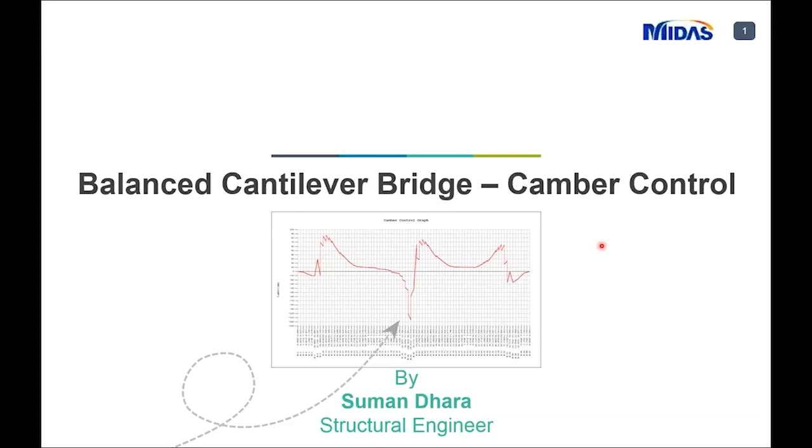So there are two methods of deck construction of balanced cantilever bridge. One is cast in place, where the false-work is put in and it's connected to the previously installed concrete and allowed to cantilever freely. Then permanent reinforcing steel and the supports would be installed, and finally concrete is poured and it's cured. So one segment would be cured on this side and this side, and they go about the next segment construction. So that's cast in place.

And there is another method called precast segmental deck erection, where the precast segments would be lifted to the position and adjusted, and then they will be pre-stressed, the new segments would be formed, and the cantilever erections would be performed. So these are the two methods of deck erection that are generally followed for balanced cantilever bridges. One is cast in place, another is precast segmental.

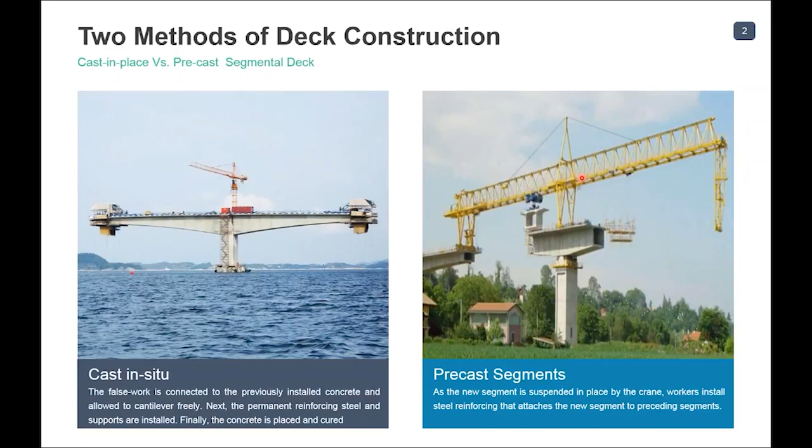So the construction stages that you define in Midas or any other program are very much required because the structure evolves. Hence, the structural analysis should be performed for each stage, and the sectional stability for each stage must be checked. As you see in this erection sequence, you have a pier table and these segments would be cast one after the other, and the tendons would be stressed, like the cantilever tendons or the continuity tendons.

So we need to consider time dependent characteristics of the concrete, and we need to consider the relaxation of the pre-stressing strands precisely. So the accumulated analysis results from the preceding construction stages are very much required for each subsequent construction stage. So we'll be carrying forward the analysis results to the next stages. That's how you make the accumulative construction stage analysis results. Alright, I hope this is very clear.

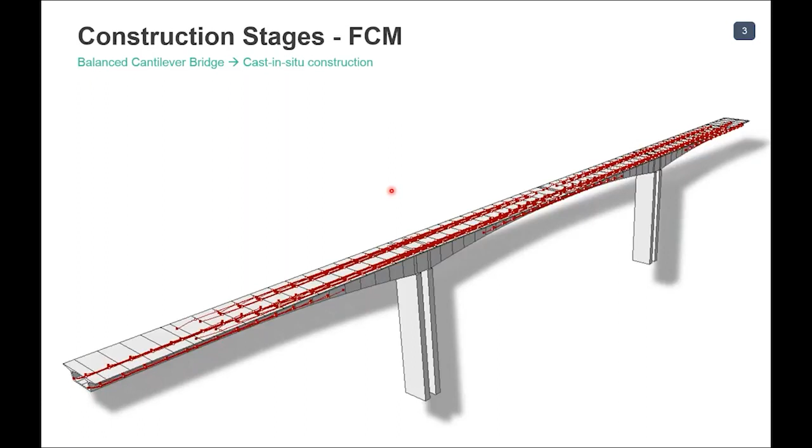So let's go into the next slide, where the main deformation problem is put on, where you have the factors that are affecting the deformation prediction. So first question is, why do you provide a camber? The camber is required to counter the deformations which are acting because of a lot of parameters. To counteract the deformation so that the traffic moving onto the bridge and the serviceability are not affected, and the rider on the bridge feels comfortable, you need to provide a pre-camber.

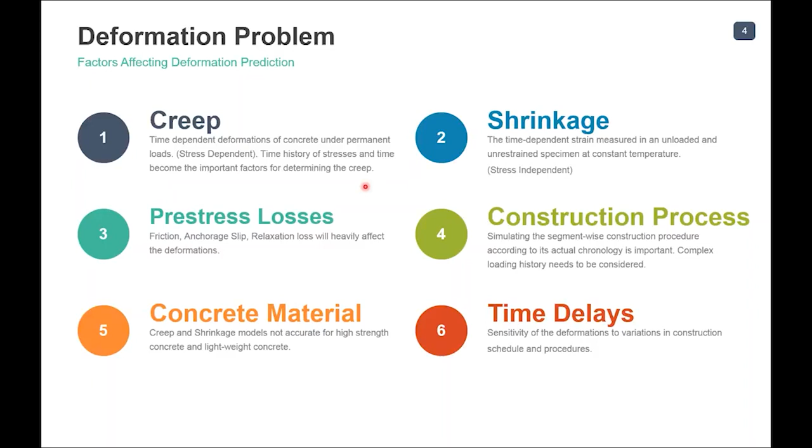So before getting into the pre-camber, you should calculate the deformation. The deformation prediction is very much important. There are a number of factors that will be affecting the deformation prediction. So first one is creep. As you know, creep is a time dependent deformation of the concrete under permanent loads. Mind you, this is stress dependent. So the time histories of the stresses and the time become the important factors for determining the creep. This is the complicated behavior of the concrete material itself.

And there's also one other material behavior, shrinkage. This is a time dependent strain measured in an unloaded and unrestrained specimen at constant temperature. That's what you call shrinkage of concrete. So this is stress independent, whereas the creep is stress dependent.

So next is the pre-stress losses. You also need to accurately capture the pre-stress losses that happen with time, like the frictional and anchorage slip. If you have a post-tensioning system, then you'll have the relaxation of the pre-stressing steel. All these factors will heavily affect the deformations.

All right, next is the construction process. As you know, balanced cantilever bridges are erected in this sequence. So this construction sequence and the chronological order of the casting of the segments is very much required, and simulating the segment-wise construction procedure according to the actual true erection sequence from the site is required. So the complex loading history needs to be considered.

Coming to the concrete material, nowadays most of these bridges are using high strength concrete, or they might be using lightweight concrete. These also affect the creep and shrinkage models that we will be considering. I'll be showing you some of the creep and shrinkage models in the coming slides, where this concrete material will affect those models.

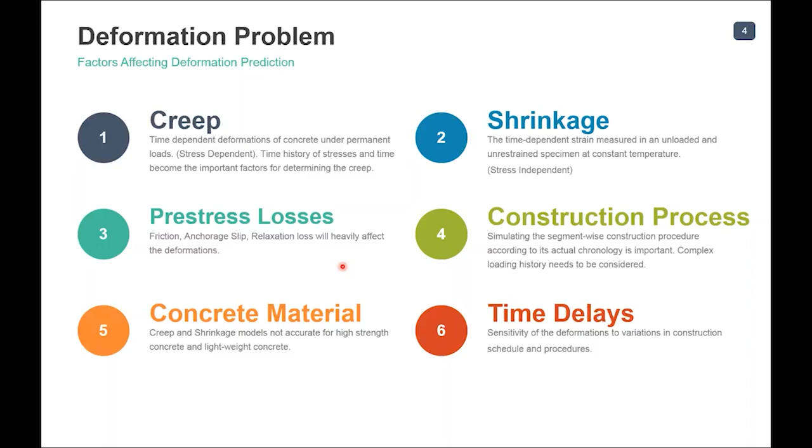So these are the main factors. These 6 factors will affect the deformations and the predictions, so we need to take care of them. Because of these factors, what happens if you have a segmental balanced cantilever bridge? You'll have excessive sag at the middle. If a rider goes here, he'll feel discomfort and the serviceability would be heavily affected.

And if you see the sequence where you are erecting from the left side and from the right side, there can be a deflection mismatch where uneven connection of free cantilevers can happen. So you also need to predict this deformation and provide the pre-camber so that these two will meet most accurately at the same location to provide a smooth transition.

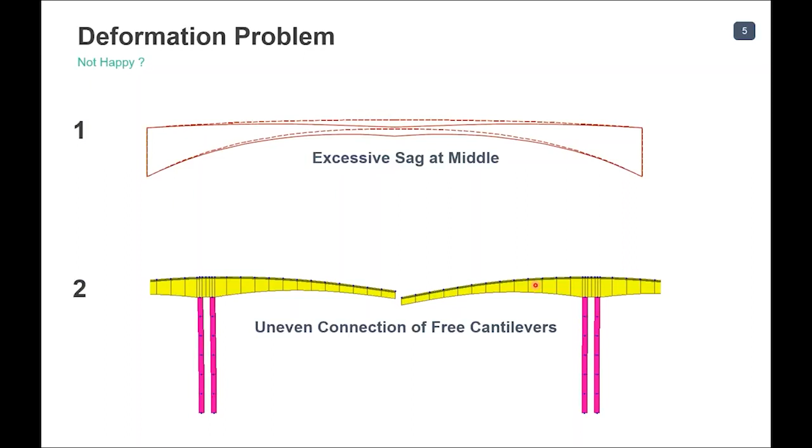So how to solve these 2 problems? Providing a pre-camber is the solution. Pre-camber by definition is the designed elevation of the span plus the necessary overheight. The design height can be straight, and the necessary overheight is what the pre-camber can be. So let's go to the next slide.

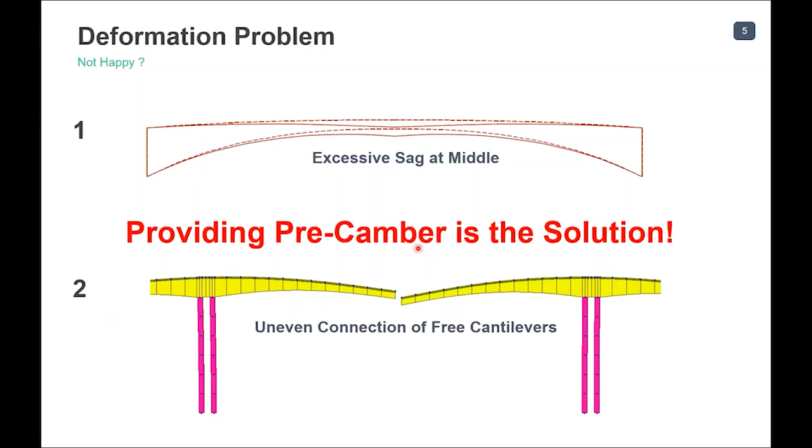So what about the deformation solution provided by Midas? In Midas, we always strive to provide innovative solutions which are practical and reliable. First, we have the factors creep, shrinkage, and compressive strength variation, which heavily affect the deformation prediction. We have in the program accurate long-term prediction models for creep and shrinkage as per codes like CEB-FIP, ACI, AASHTO or IRC.

So we have them as per code, and you can also give user defined values for the creep coefficient and the shrinkage strains. The program will consider the creep coefficient and shrinkage strains along with the compressive strength variation in the construction stage analysis. You can refer to this very interesting paper by Bazant 2001, a pioneer researcher who started these creep and shrinkage prediction models.

Compressive strength variation based on the maturity of the concrete member can also be defined with respect to the code, or you can have user defined values. Next, in the program, we have the construction stage analysis. I hope most people are aware of the construction stage analysis in Midas Civil.

We'll be performing the construction stage analysis accurately, taking into consideration all the factors involved in the balanced cantilever construction process, like the formwork load, how the segments are erected, and the time schedule of the two piers. Including all those details, we can accurately capture the pre-stress losses, even the relaxation loss of the tendons.

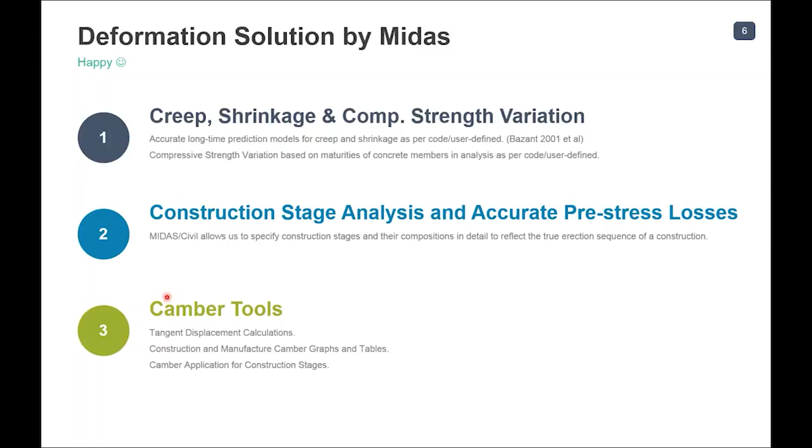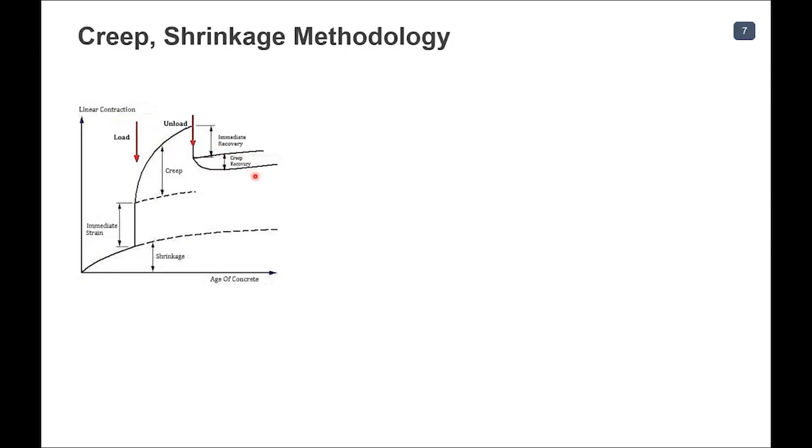And with the unloading of some loads, there can be an immediate recovery of the strains, elastic strain recovery, and the creep strain recovery. So this is the overall figure that speaks about the creep and shrinkage.

So coming to Midas, Midas uses an FEA approach with a time step method for calculating the creep strains. So the total strain here has components due to elastic and creep strains, due to shrinkage strains, and also due to thermal strain. This thermal strain will come into picture when you provide the thermal inputs.

All right. So coming to the creep strain, creep strain is the integration of the stress history. You integrate this whole stress history in a particular time period, like the construction duration from 0 to T days. You integrate the stress history with respect to the specific creep. So the stress is applied in time steps, keeping every other thing constant in a particular small time step, as you can see in this stress history curve.

So then there would be specific creep curves that would be generated with respect to the time. At each time interval, the specific creep curves can be obtained, and then you superimpose them. So you use the linear superposition method to combine the stress history with the specific curves to get the total creep strain. So it is an accumulative effect using the linear superposition, and the total creep strain is calculated.

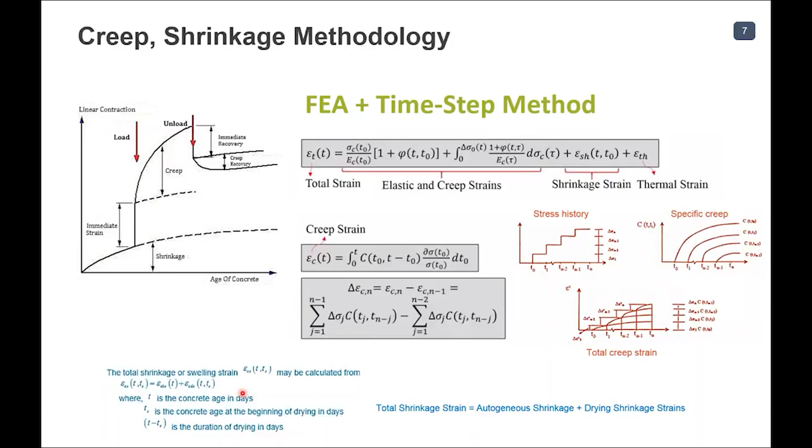So you should always take care about how the true erection sequence takes place on site, and you need to simulate the same things in the program to get the correct results for the design. If the actual construction stage is halted for any reason, then additional time steps can also be inserted into the respective stages, which I'll be showing you in the demo.

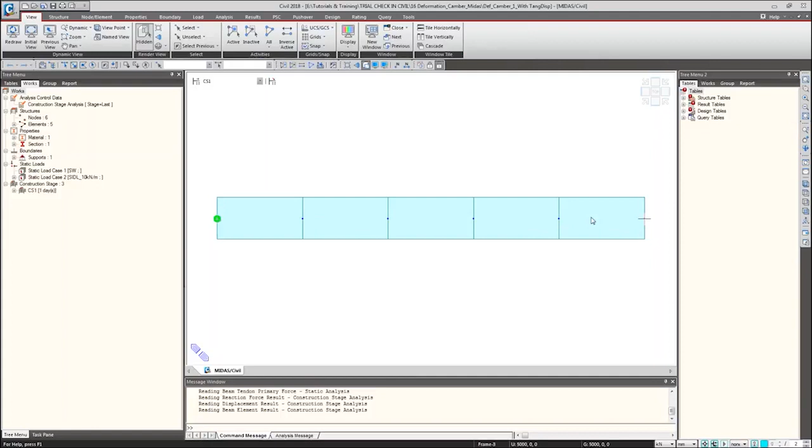Let me jump into the program now. I'll show you a trial model I have developed. You can see this is the cantilever. In stage one, this part is 5 meters, and this is the section. Coming to CS2, another 5 meter segment is added to the rest of the structure. Similarly, CS3. I'll perform the analysis and go to the results to check the deformations.

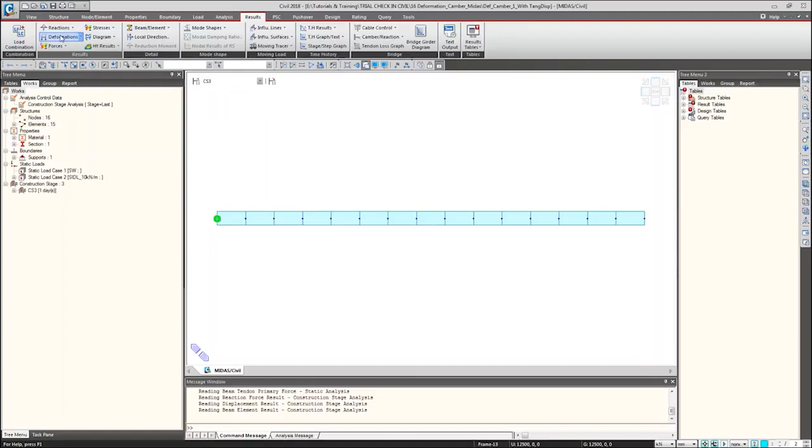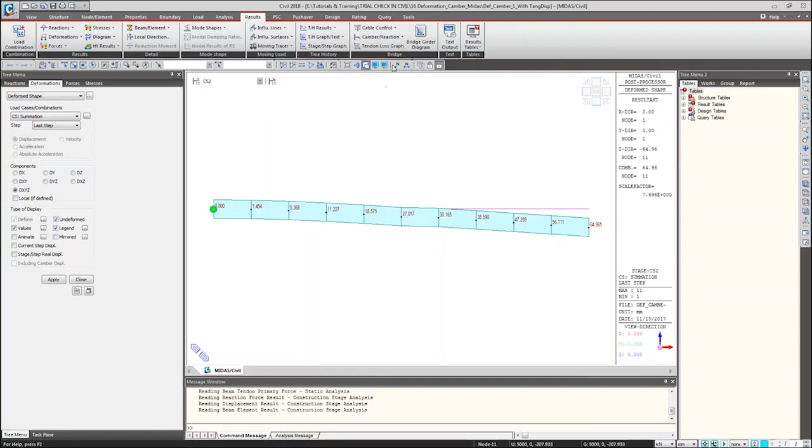For the deformations, I'll go to CS1, turn on the legend, turn on the undeformed shape, and turn on the values. You can see 4.789 for this segment. Coming to CS2, this is 64.965, and at this location it's 27.017. Coming to CS3, there is a kink over here. This is 257.

To check the current stage displacement, you have this option, current step displacement. For this to appear in the program, go to construction stage analysis and turn on save output of current stage. Then this option will appear. Select it, and if you go to CS1, the current step and stage displacements are the same for CS1 because there are no changes in the structure.

So in CS2, if you see, there is a change in the structure. This segment is being added. So in the current step, only because of this loading which is occurring in this 5 meters one, there is a subsequent deformation here. But if you turn off this and check, this is the addition of the previous displacement which happened in CS1. So that's why it's 20. That's why if you see here, the previous displacement would be added to this.

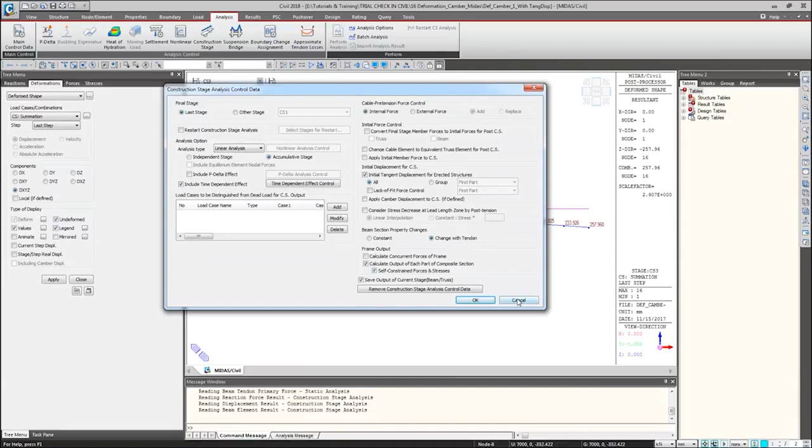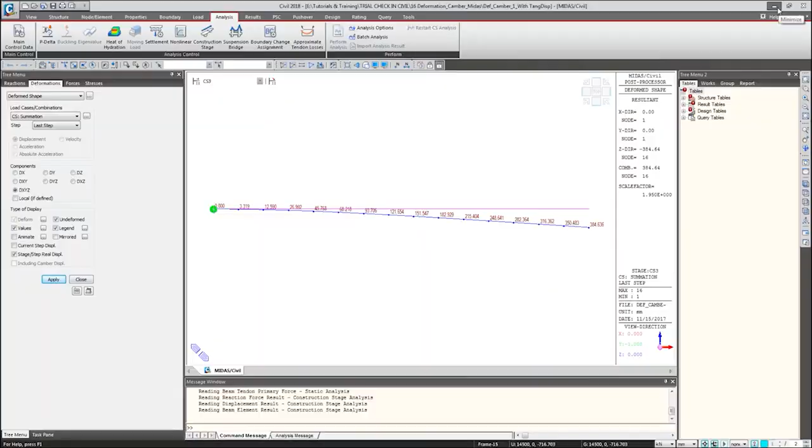So to get these tangent displacements, in the program you have to go to construction stage analysis control and turn on this initial tangent displacements for erected structures. Then the program will give you this option of stage step real displacement. So at CS1 you can check this. In CS2, there is a change of deformations considering the tangent displacements, and in CS3, this is the value. Alright, I hope everything is very clear. So let's proceed. So these are the tangent displacements and you'll be getting the manufacturing camber accordingly.

So in Midas, as I showed you, there are three features that are available. One is this construction stage analysis control, where you can directly get these tangent displacements and you can apply this camber displacement to construction stages. I'll be showing you this feature again.

Coming to the general and FCM camber. If you perform the analysis, then you can see these two options that are available in the program. One is this FCM camber control and the other is general camber control. Alright, let's get into the program now. I'll show you this in detail.

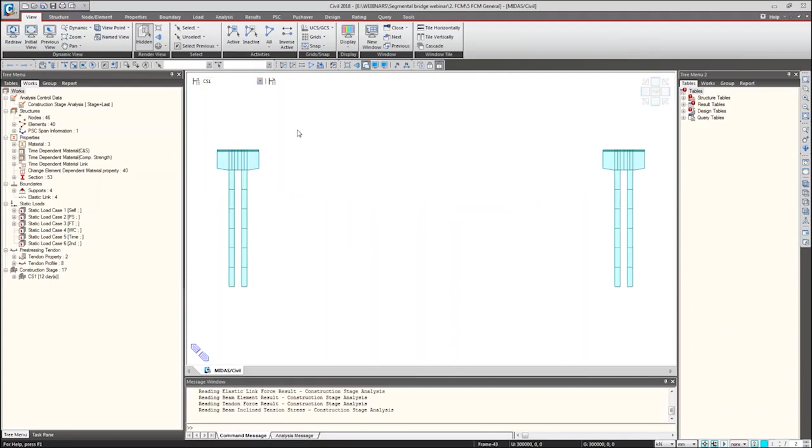Suppose you have a balanced cantilever bridge like this. So we have stage 1, stage 2, all these erections which are going on in a balanced cantilever fashion, and there is a stitch in CS15, and if you see this CS17 where the 10,000 days duration is provided, not changing any of them, is to capture the creep and shrinkage long-term effects.

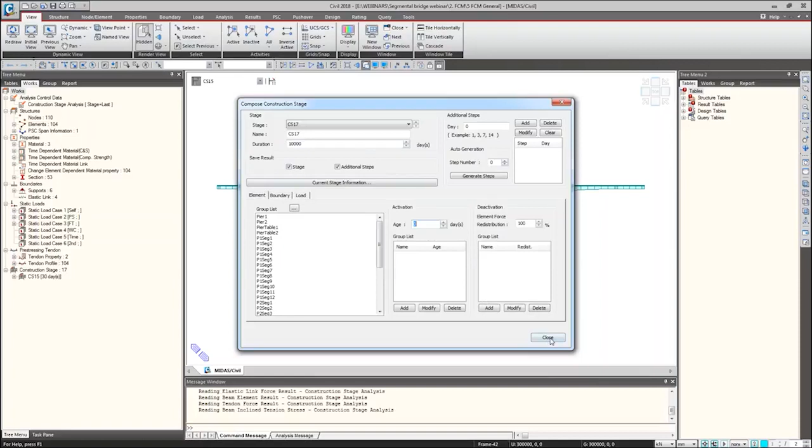So I have performed the analysis to save time. These are all there in the works tab. You can see all the boundary conditions and the time dependent material properties. As I mentioned in the slides, you can give user defined values or you can select the code for the creep and shrinkage calculations. So here you can select the CEB-FIP code.

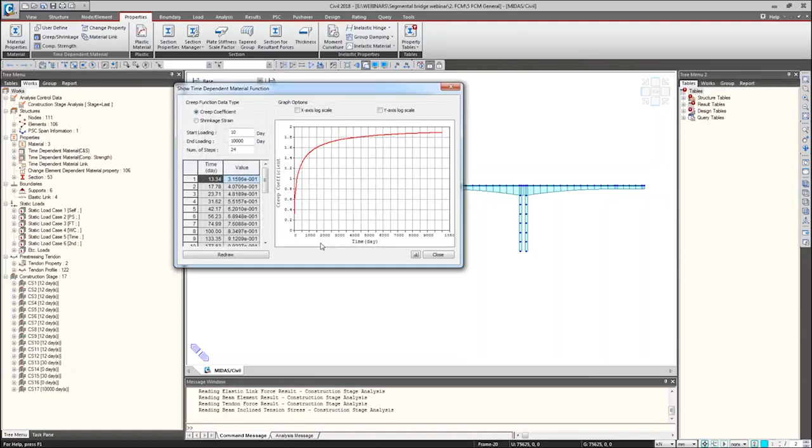All these codes are available and you can go to show calculation results to check your creep coefficient and the shrinkage strain. This is only for checking. The program will take its own creep coefficient curve based on the construction stages because the duration, start loading, end loading would change for each construction stage and it's an accumulative process. So this is only for verification that the program shows you this result.

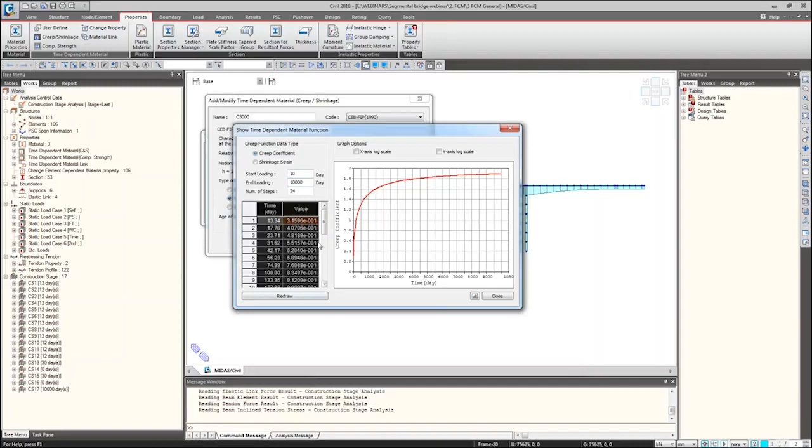Alright, so you can specify the user defined as well. And similarly the compressive strength variation. So for the superstructure I've selected CEB FIP 1990, and this is the compressive strength variation curve with respect to time. So these are the time dependent material properties that I have given in the program.

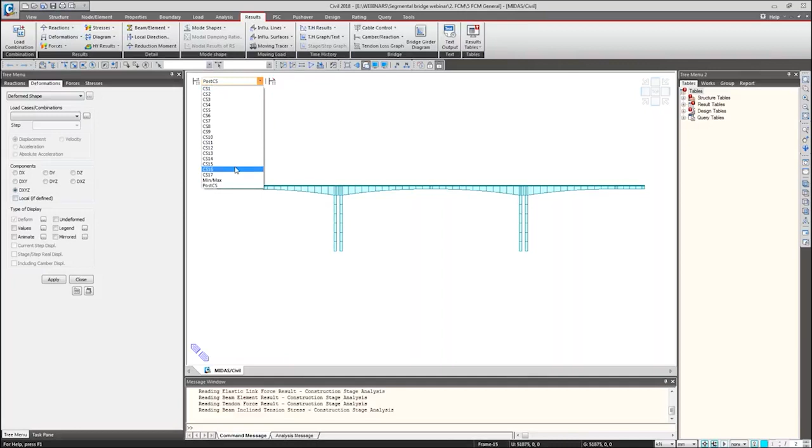Alright, so let's go to the results now. I'll go to results, I'll go to deformations. I'll go to this stage, which is suppose CS16. I'll click apply. So this is the deformation in Z direction. I'll turn on the legend. I'll turn on the undeformed line.

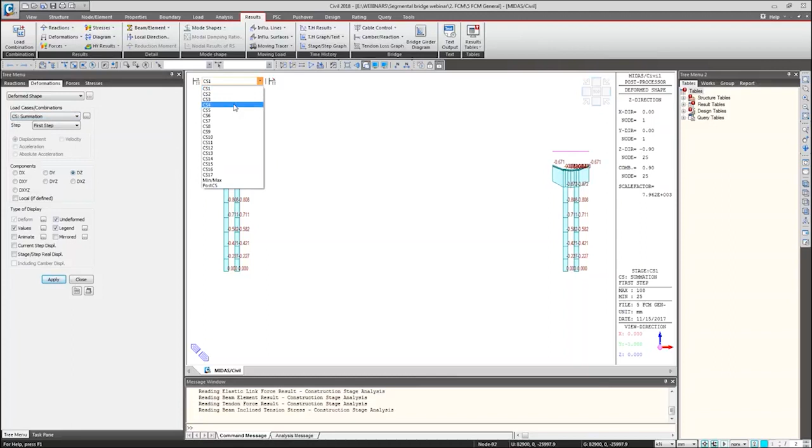So this is the dead load deformation including the pre-stress. So this is the summation deformation. If you want to see the dead load deformation, this is the dead load deformation. Including the pre-stress effect, creep and shrinkage effect is nothing but the summation one. So let's see the summation results. So these are the summation deflections, which are nothing but your construction camber. Alright.

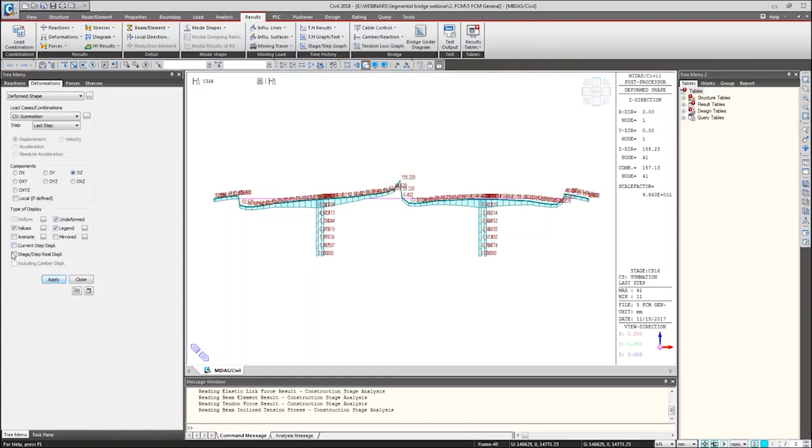So till CS15, this would be the deformation profile changes. And at CS16, there are the key segments that are coming up to connect these FCM ends and this intermediate one. So you can always switch to the current step displacement and check, because of only the current loading of this construction stage, how is the displacement profile. And similarly, you can take into consideration the tangent displacements and check the deflections.

So you can turn on the stage step real displacement and check how the real displacements are going up. So if you see in CS15, there is a difference in the tip of the cantilevers. So this is regarding the stage step real displacement. I hope everyone is clear about this current step displacement, the construction stage displacement and the stage step real displacement.

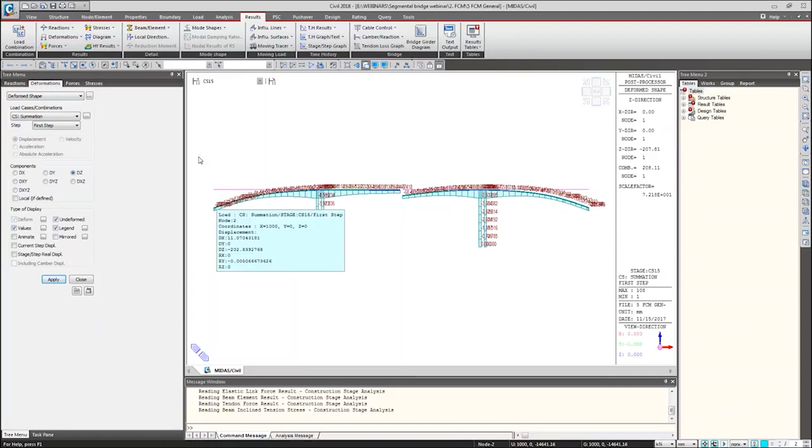Alright, so now we accurately predicted the deformations for this balanced cantilever bridge, taking into consideration all the formwork load, all the erection sequence, time dependent effects, everything has been considered. The pre-stress losses are also being considered. So we assume that the deformations are with sufficient accuracy. So we'll proceed for providing the camber. For that, we go to the camber and click on this FCM camber. So go to FCM camber control.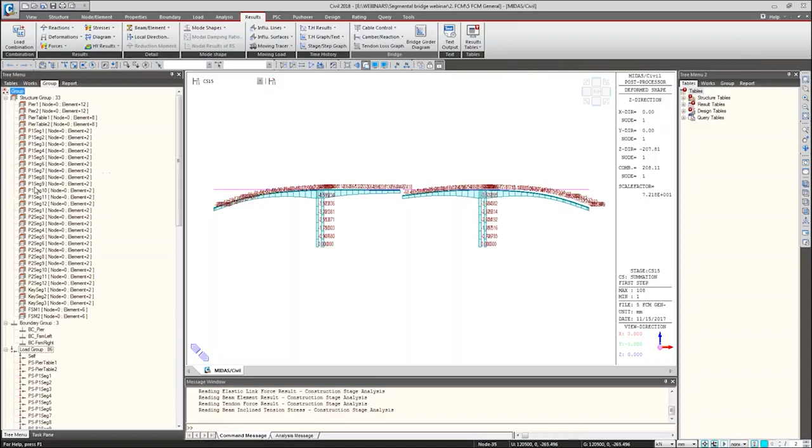So the program will ask you for these groups: the element group of the bridge girder, support node group, and the key segment element group. So I'll go to group. I see that no groups are defined here. So I'll unlock the model. I'll define a bridge girder group. I'll select the superstructure and I'll drag and drop this bridge girder group. So you see 83 nodes and 82 elements have been assigned. You can double click and cross check.

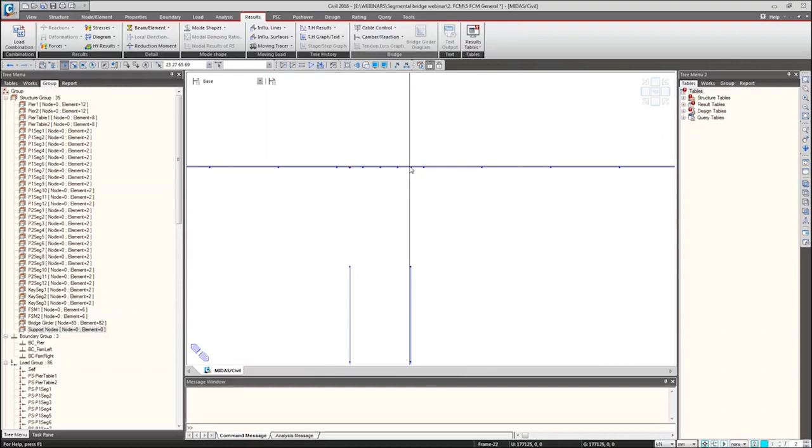So I'll add another group, which is your support node. If you see here, for a balanced cantilever superstructure, we are connecting this with a rigid link. So these nodes are your support nodes. We need to select these as the support nodes because your cambers would start from here. So I'll select this support. So these support nodes are selected. I'll drag and drop. So these are 6 nodes. So actual supports are these ones.

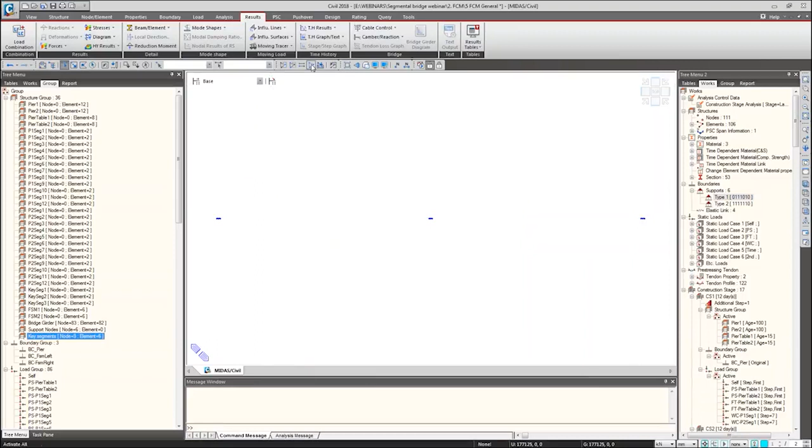Now I'll add another group, which is key segment. So I'll select all these key segments. I'll activate them. Select all. I'll just drag and drop. So the key segments, support nodes, and the bridge girder groups are created. Now no need to perform the analysis again.

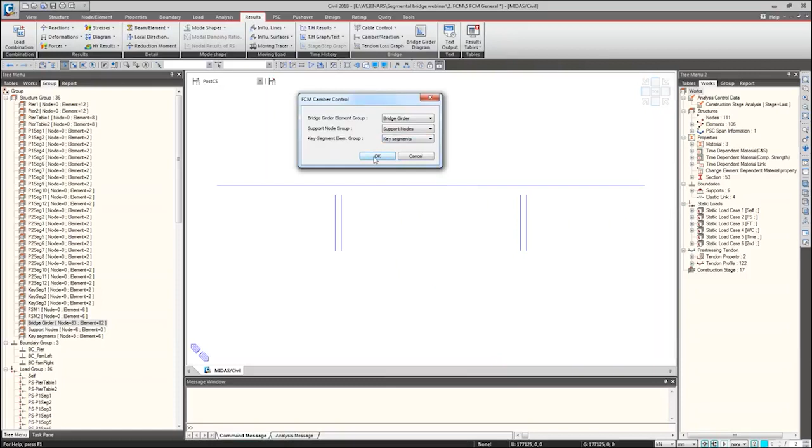So I can go to Camber, FCM Camber, click on this FCM Camber control. Now I'll select the bridge girder group which I have recently created, and the support nodes and the key segment locations group. I'll click OK. So now I can directly go to FCM Camber and click on FCM Camber Graph View. You can select any load case that you want, either dead load or this summation. So I'll select summation, which you generally take, click OK.

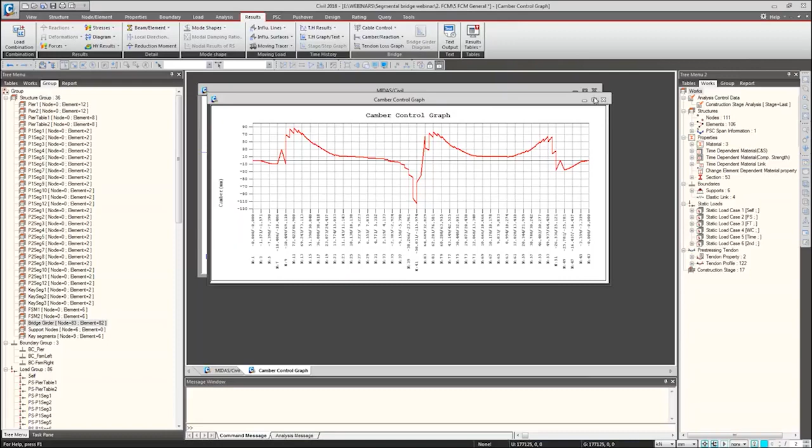So this is the FCM camber for a balanced cantilever bridge. This is the construction camber for a cast in place balanced cantilever construction method. So you generally take this construction camber into account. You see at these two pier locations and at the intermediate key segment and here at the key segments there are kinks. These are all because of the adjustment of the formwork.

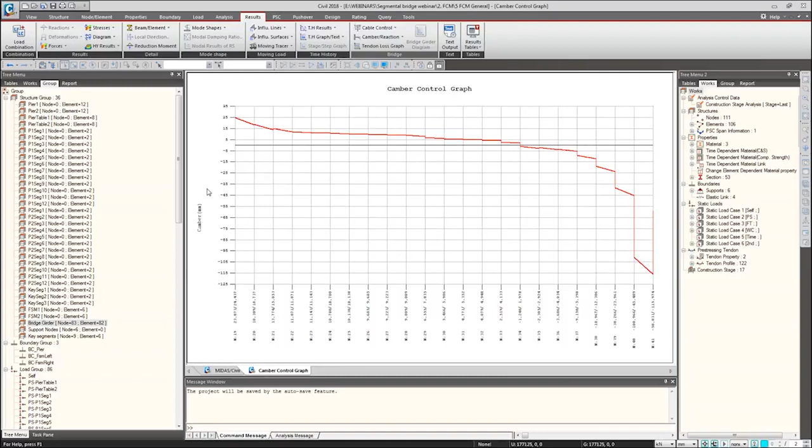So you can zoom in the program. You can right click and zoom out and check these values. You can see these are the node numbers and these are the camber in mm that you provide. So I'll zoom out all. So this would be the opposite of the deformation. Let me cross check that. So you can go to CS17, which is the end of the construction stage. Go to last step, click apply.

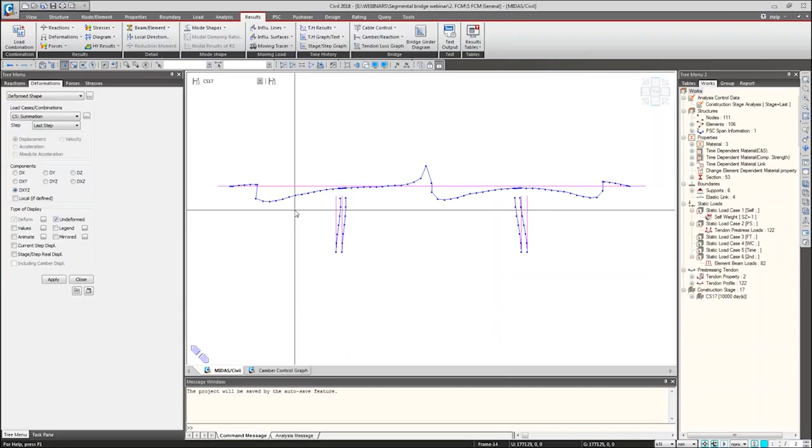So this is the undeformed one. Let me turn on the nodes. Yes. So see here, this is coming down here and you provide upward camber. So this would be the opposite of the deformation. Alright, I hope the FCM camber is very clear.

Coming to the general camber, you also have this general camber control. So this is for any other type of bridge. So for a balanced cantilever bridge especially, we have provided a separate FCM camber and its FCM camber table also. So you can turn on the table and check the values.

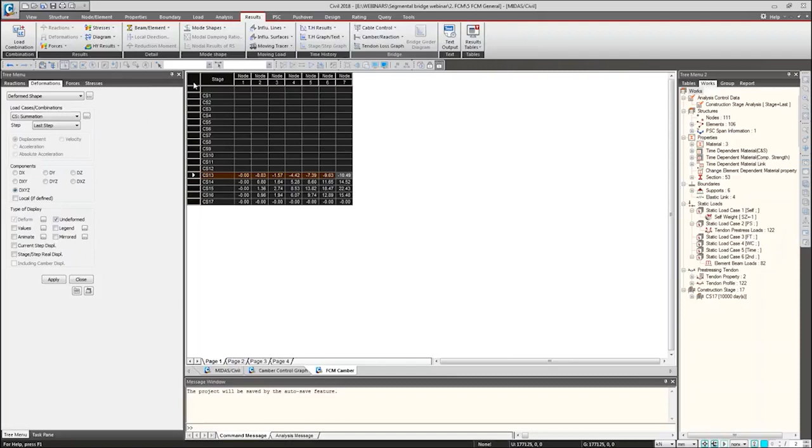So in the nodes, you see at the 7th node, in each construction stage the camber needs to be provided. So you can get this in terms of pages. As the columns are huge, like the length of the bridge is huge, you have this in pages. So you can directly copy paste this in Excel and use it and cross check them.

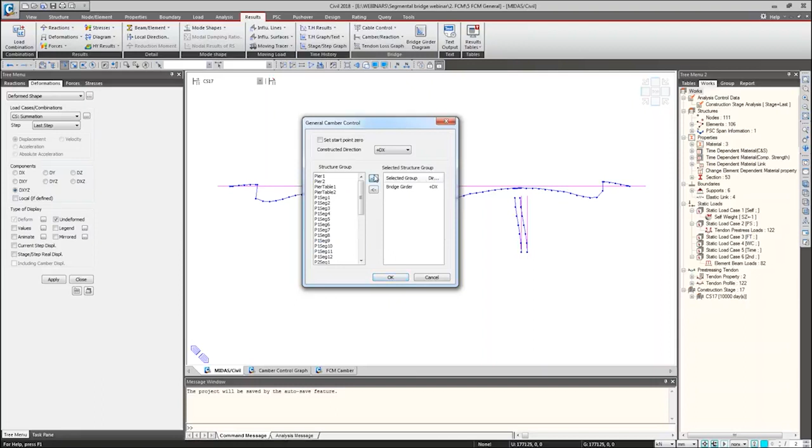Alright, so this is the camber table. So you can get these values. These are nothing but your deformations. Alright, so let's go to the general camber. In general camber, this is for any other bridge like an FSM bridge, like a full staging method bridge where you need the camber to be considered. Then you can select the direction of the construction and select your bridge girder group. Okay, and then you can get the curves.

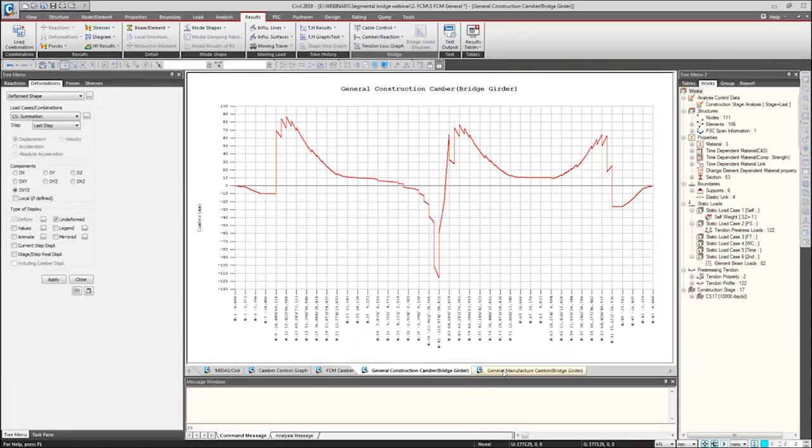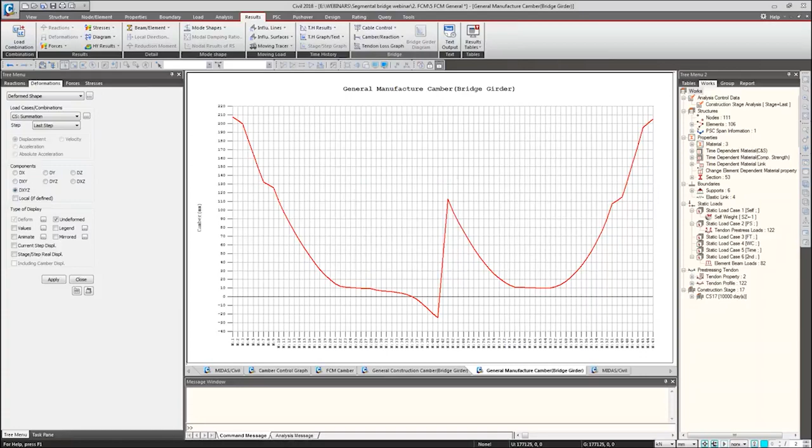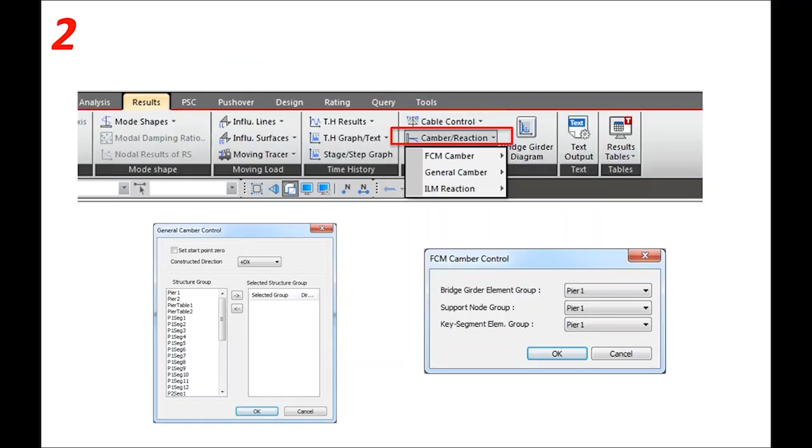I'll go to general camber and click on general camber graph. So here you will be getting the construction camber curve as well as the manufacturing camber curve. You can also get it in tabular format. So this is the construction camber table and this is the manufacturing camber table. These are all the camber values where the tangent deformations are also taken into consideration for the manufacturing camber. Alright, so I hope these two options are very clear.

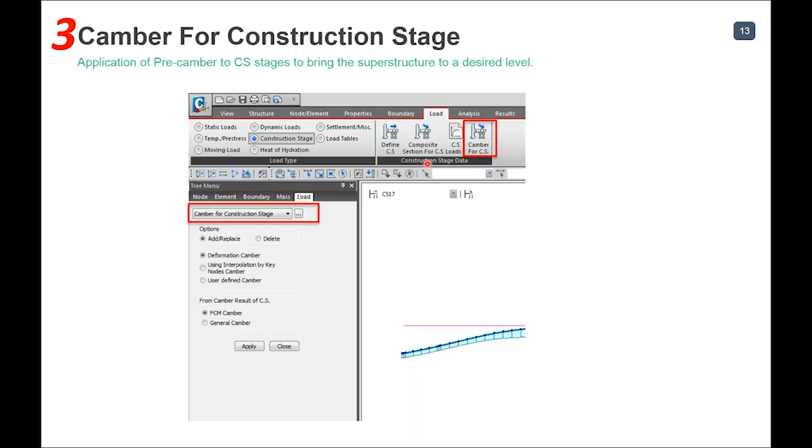Coming to the next option, in Midas we have this camber for construction stages. You can go to load, construction stage, and click on camber for CS. So you can directly input the camber to the construction stages. I'll close these tabs. I'll go to load, click on camber for construction stage, and here you have generated the FCM camber values beforehand. After the analysis and after this grouping, you got these FCM camber values.

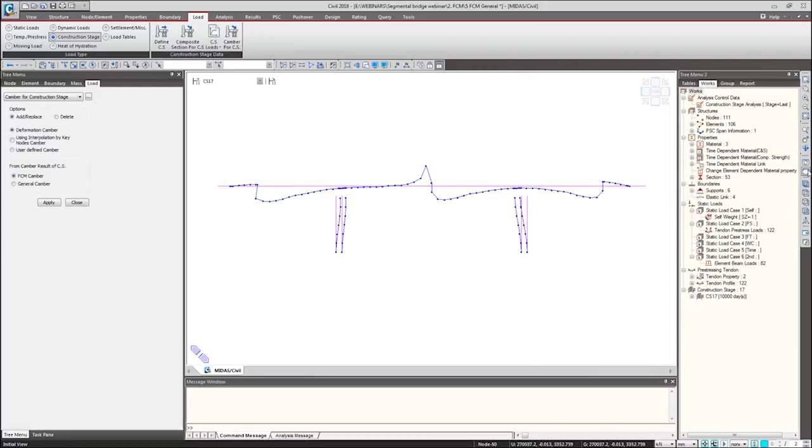Now if you want to provide this to the superstructure, you can go to initial view, just lock and unlock, go to construction stage, Camber for CS. Now I'll select the bridge girder group. Now I'll directly select this deformation camber, or you can specify the user defined maximum camber: you provide the start and end node, then you give the maximum camber, and the program will interpolate the in-between cambers, or you can actually specify the camber for each node. So these options are all there.

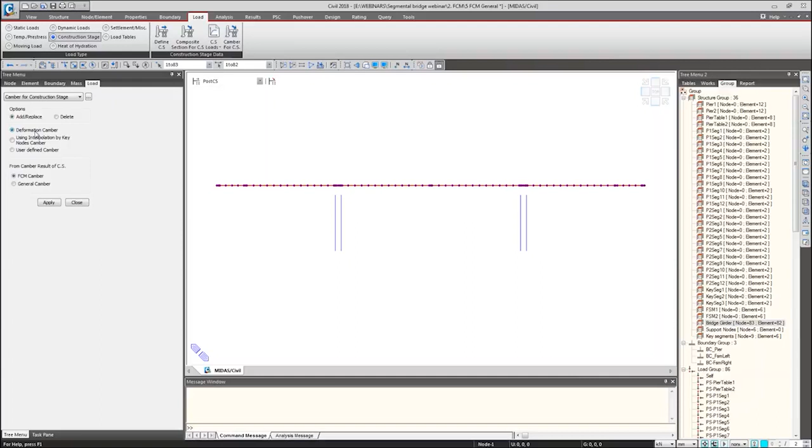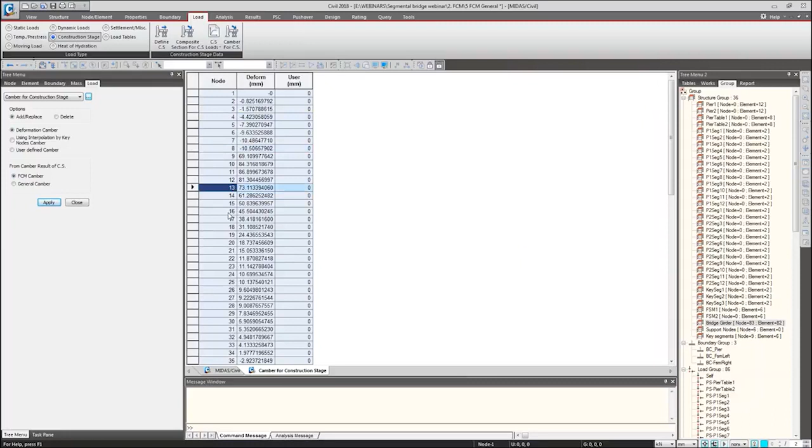So when you pick this deformation camber, the previously calculated FCM camber values would be automatically provided at their respective node locations. So I'll click apply. You can click this three dot button to check the camber values. These are all the values that have been obtained from the results. This has been applied to the respective nodes in the construction stages.

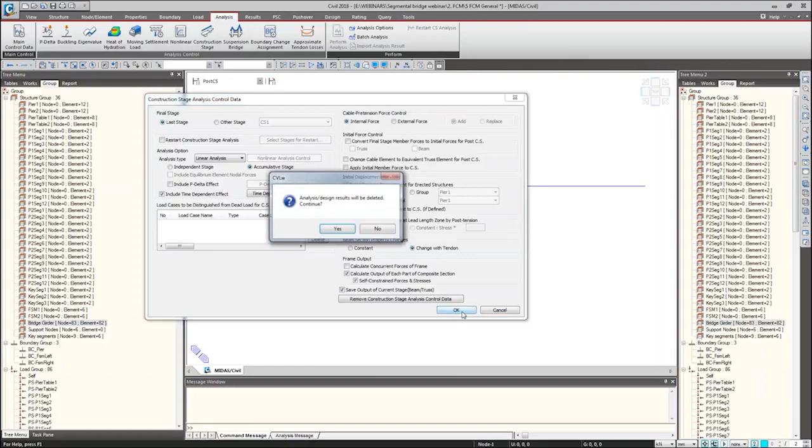All right. So to check this, you need to go to analysis, go to construction stage. The program needs to apply this camber displacement to the construction stage, so you have to turn on this option. We can rerun. Generally, you don't need to rerun because you can always keep all those options turned on, and once you perform the analysis, you can adjust the cambers. But here I forgot to tick that parameter. So it will just take a couple of minutes.

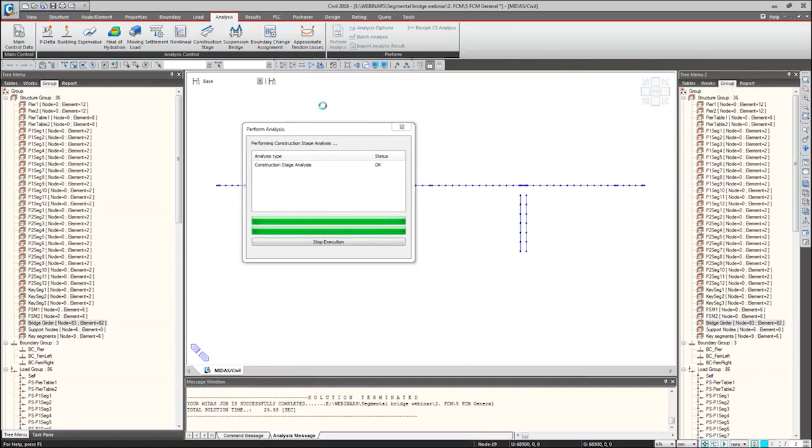Yeah. So you can appreciate the solver speed as well here. It just took 30 seconds. That's great news. Okay, I'll go to deformation. I'll go to end construction stage, summation, click apply. So this is the deformation, and you can see this current step and the stage step real displacement.

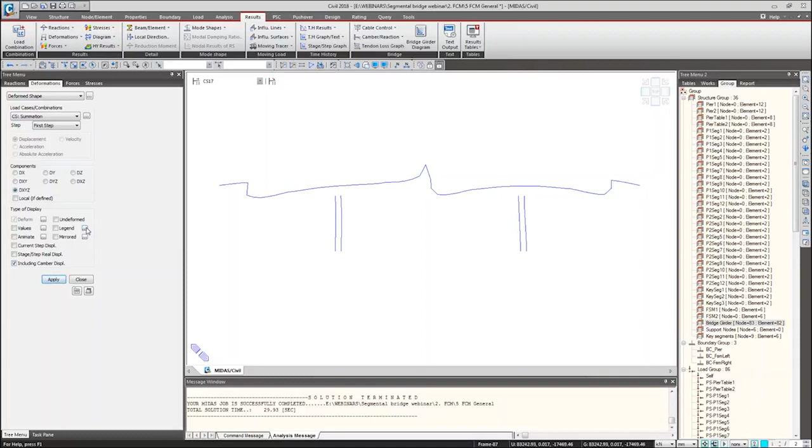Now when you turn on that parameter in the construction stage analysis control, you'll be getting this option as well: include camber displacement. So the deformation figure will show you the result including the camber displacement. Let me turn on the legend, click apply. So you see the deformations, which are in DZ. The camber I've applied only in the DZ direction.

So in the last step, you can see it's almost straight. So the deformations have come up to the level that we required. So this is how you can directly apply the cambers to the construction stages and check. Alright. So let me get back to the presentation.

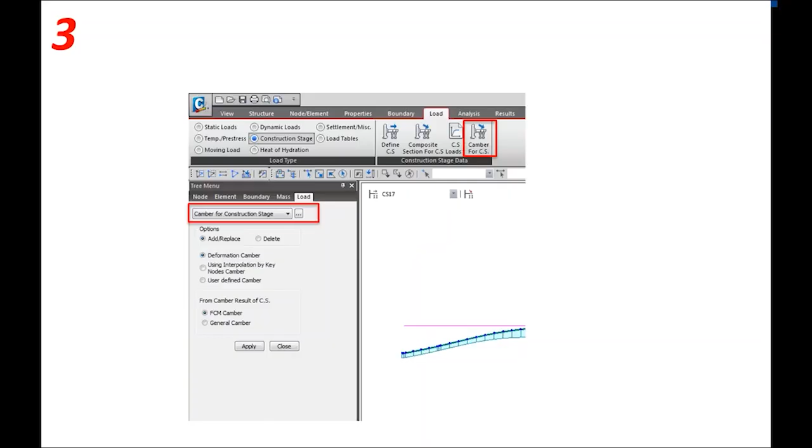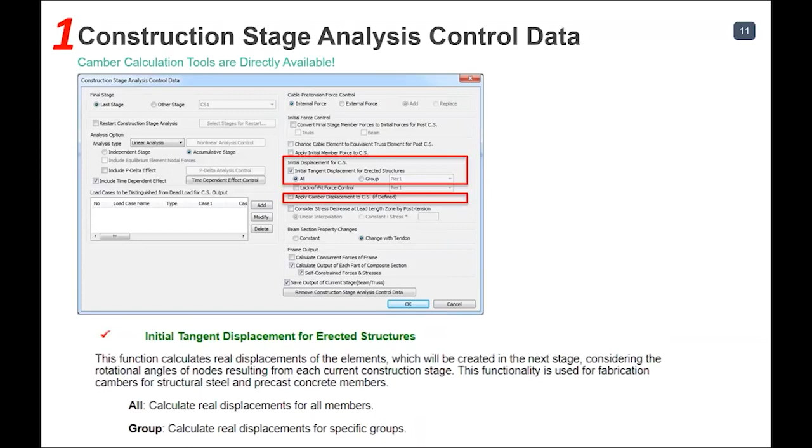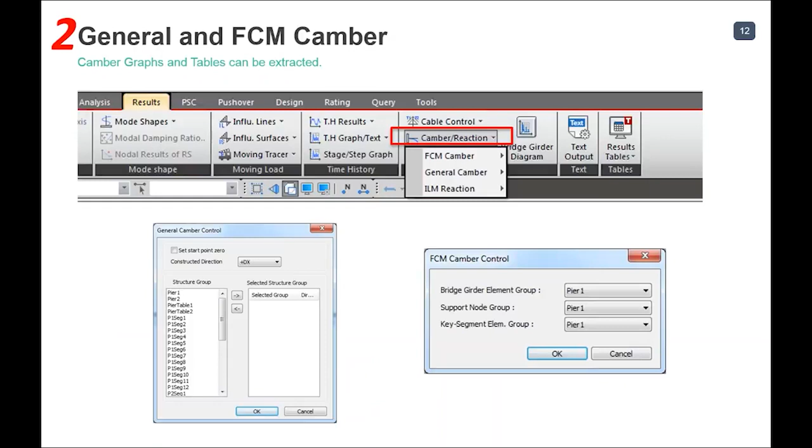Let me summarize what we have discussed. So first is these parameters, where you'll get to know all these initial tangent displacements, and applying the camber displacement to the CS, where you can specifically generate the FCM camber as well as the general camber. So you can get them in the graph or in the tabular format directly, and you can apply this to the construction stages. So with application of pre-camber to CS stages, you can bring the superstructure to a desired level and cross-check in each construction stage whether you are satisfying it.

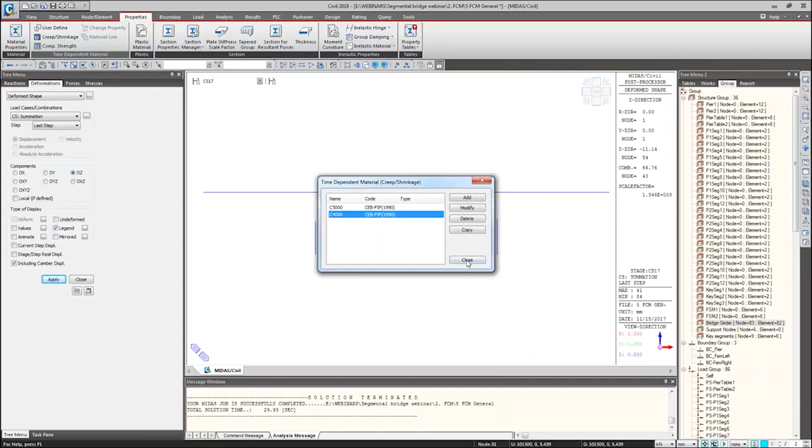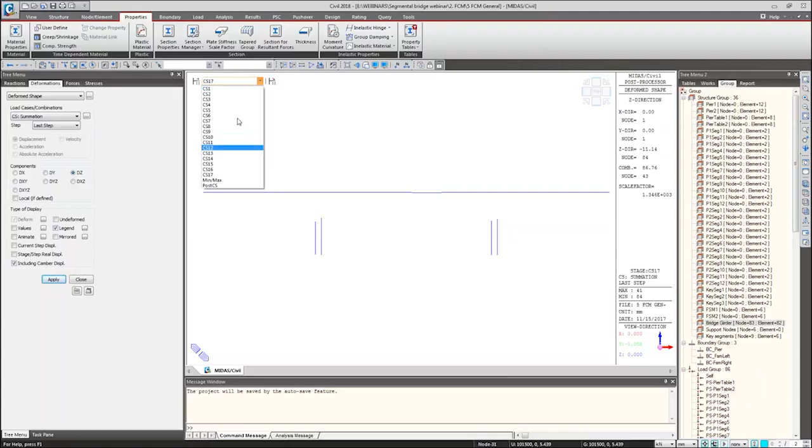So one more question from Mr. Manuel: are the formwork travelers or lifting frames included in your analysis? So we have given full freedom for you to manipulate your construction stages. So if you have any formwork or lifting frames that are specific to your bridge project, you can include that in the program. Suppose in CS2, here we have taken into consideration these loads. So you generally apply them as nodal loads. So you can manipulate these values according to your traveler loads. So you can actually simulate the true erection sequence of the balanced cantilever bridge in the program.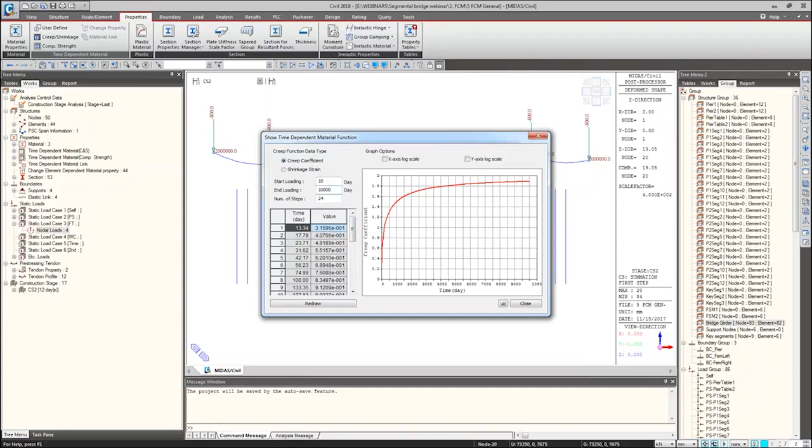So I'll go to this creep shrinkage curve. So it's with 3 days. Yes, another follow-up question, that you see only 10 days. So when you turn on this shrinkage, I can give this 3 and click redraw graph. Alright, so I can change this and check. But the program will take this value internally. This is just to show you the curve and its behavior for these parameters. Okay.

So another question from Mr. Himanshu, the difference between manufacturing camber and construction camber. So this is a bit confusing, so I'll try to explain in simple words. So if you see the construction camber here, you got these values from the program. So in the construction camber, you don't account for these tangent displacements. These three values which are there, you don't consider. Because of the construction sequence, there is a change in deformations, which you will be considering without considering these tangent displacements. That is called construction camber.

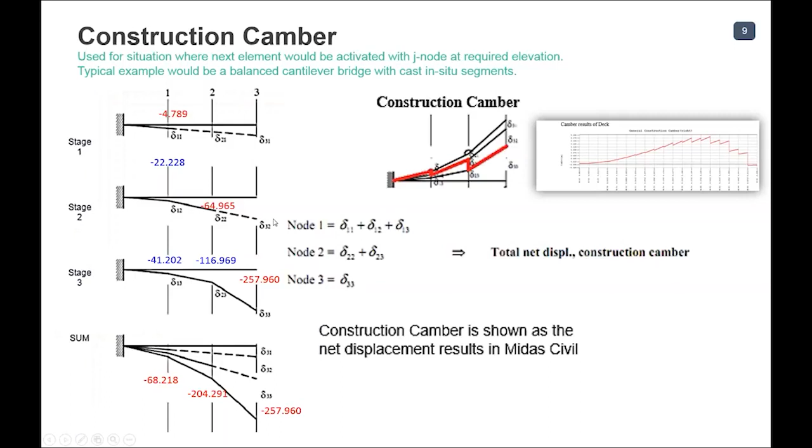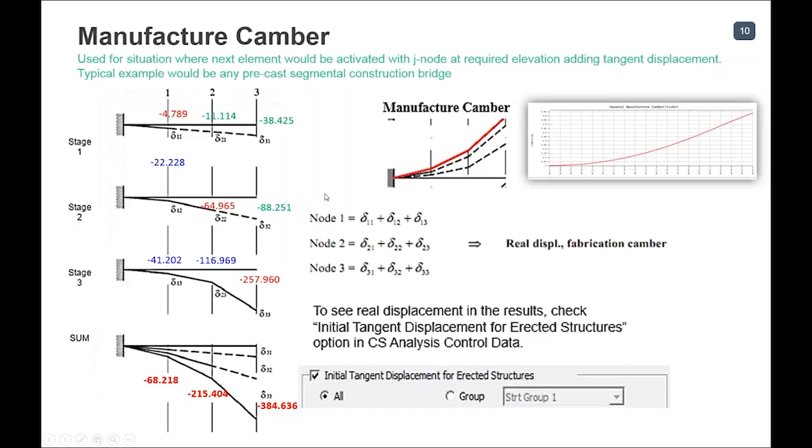So you can see this formula. But if you see the manufacturing camber, for this displacement at this node 2 location, you also consider these green ones, which are nothing but your tangent displacements. So generally in precast segments, you don't have the adjustment. You don't have that allowance to adjust this tangent displacement. So that's why you need to consider this in the camber, and that's why it's called manufacturing camber. All right.